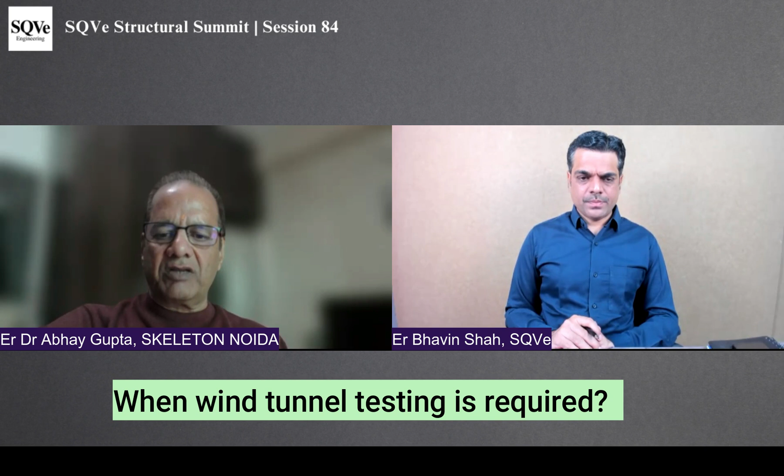If I refer to IS 16700, the code in India for safety in construction of tall buildings, basically for design of tall buildings, the new code has made it mandatory that all buildings and structures more than 150 meters high shall be subjected to wind tunnel testing. However, IS 875 Part 3 very clearly says any situation or building not covered by the provisions of this code, which is not a prismatic building. In general, we go with rectangular, square, circular, or triangular prismatic shapes, which do not have changes in geometry as you go up, or any offsets, or say in plan a building of plus shape, because architects, they dream, they are very creative people.

Architects dream some fantastic structures, and then the next day they draw them on paper and show them to the clients, and clients really get fascinated. And then it becomes a big challenge for the structural engineers like us. So they make really good shapes of the buildings.

We all have seen Burj Khalifa. The shape of Burj Khalifa has specifically been driven from the viewpoint of wind resistance. It is there. But there are many other buildings.

Recently, I was watching a video about the Capital Gate Tower in Abu Dhabi. If you have not seen that tower, just go to Google and search Capital Gate Tower. There's a vertical straight core, but the entire building is leaning on one side. So thousands of tons of weight is on one side on the foundation, completely eccentric. Those kind of shapes are very challenging, and you can't get the answer even for a standalone structure of that kind.

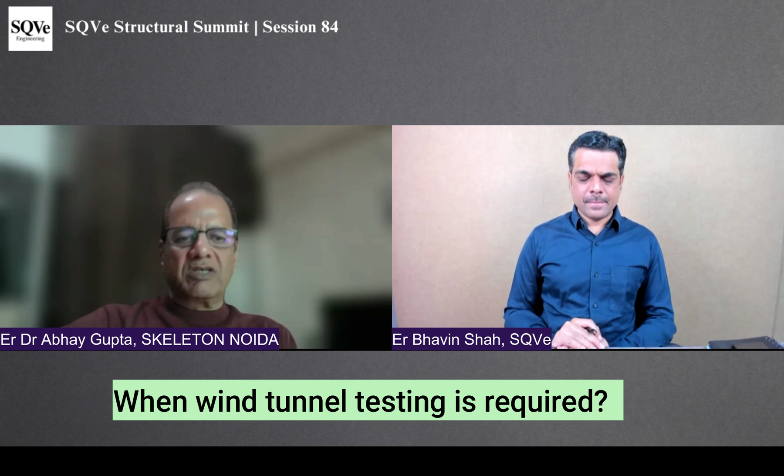Now, what is wind tunnel testing? Similar to many other testing, whether it is material testing or soil testing. Now, soil testing you cannot do sitting in the office. You have to take the equipment to the site and get the testing done. Every site is different. Similar to wind tunnel testing.

Now, in a wind tunnel you need a simulated facility which will create a wind environment similar to the atmosphere. Similar means the characteristics of the wind flow on the building or structure should be matching in the wind tunnel and in the atmosphere. Matching means what?

Those four parameters I told you about: mean wind speed and turbulence intensity. These two things are covered by matching the profile - the profile of wind velocity variation from ground to top. I'll explain more on that a little bit later.

Third is energy spectra. Fourth is turbulence scale, meaning the size of the eddies. Some wind tunnels only work on the first two parameters, but more refined, better facilities have all four parameters matching in the simulation. So once you have simulated those four using different techniques, that is wind matching.

In that, you put a model of the building, a scaled model of the building. You cannot put the whole building, so you put a scaled model to some suitable scale, generally 1 is to 100, 1 is to 200, 1 is to 300, or 1 is to 400. If the building is 400 meters high, a 1-meter high model has to be made. So that model is made.

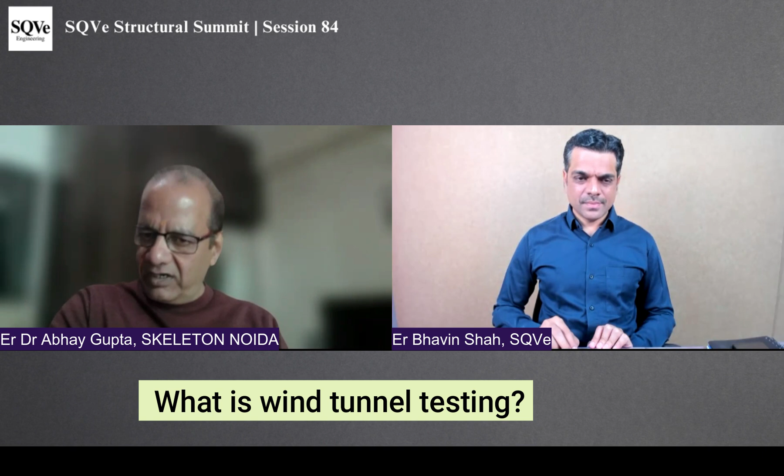With this brief introduction and necessity explained, we can take up the queries which have been raised. I have gone through the queries, very interesting ones. Maybe some of them have already been answered in this briefing, and the more complex or specific ones we will take now. So, Bhavin, please, let's go to that.

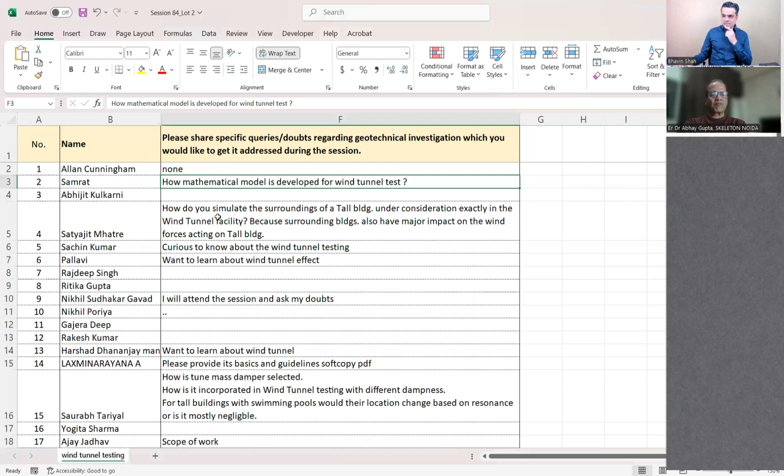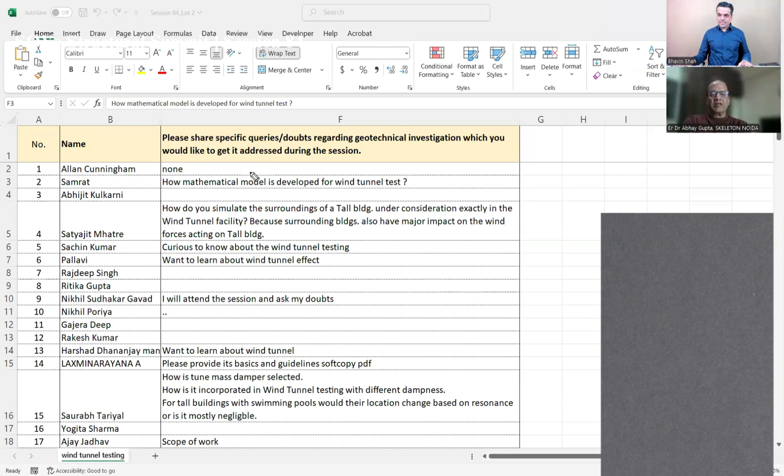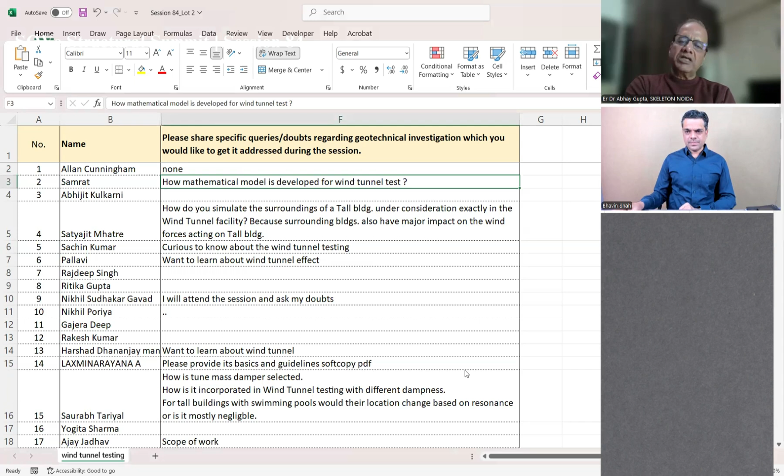How is the mathematical model developed for wind tunnel test? I believe he's asking how the different parameters are simulated. It is a scaling exercise - if I'm modeling a 400-meter high building to 1 meter, my geometric scale becomes 1:400. The same scale applies to everything else in terms of length. Then for velocity scale, suppose my design wind speed is 50 meters per second, but I cannot develop that inside the wind tunnel - normally wind tunnels test at 10 to 20 meters per second. If a facility tests at 10 meter per second, then 10 meter here and 50 there means my velocity scale becomes 1:5. With the geometric scale and velocity scale, I can get the time scale. This way, various scales are deduced, and a formulation of the prototype prediction is done. Some literature I've shared explains this. This is how the mathematical model for wind tunnel testing is developed.

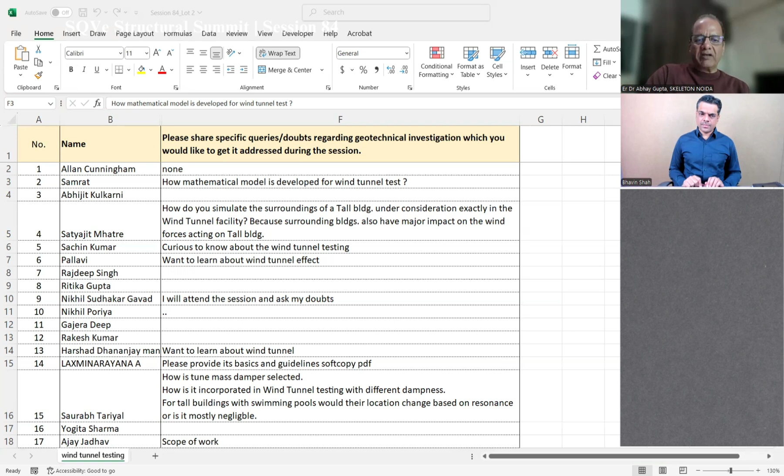Next question from Satyajit - how do you simulate the surroundings of a tall building exactly in the wind tunnel facility? This is very challenging. Whenever a project is tested, the wind tunnel testing agency generally asks the client to provide height and size of buildings within about 10 times the height of the building under consideration, but it's very difficult to get that data. So for a nearby area, about 3 to 4 times, they ask the client for building details. Otherwise, nowadays Google Earth provides very good information about objects present, and there are good tools that convert that Google Earth data into 3D images, which are then converted into physical models placed around the building. Some photographs I've shared show these building blocks which have been placed - most of them nowadays are done through Google Earth.

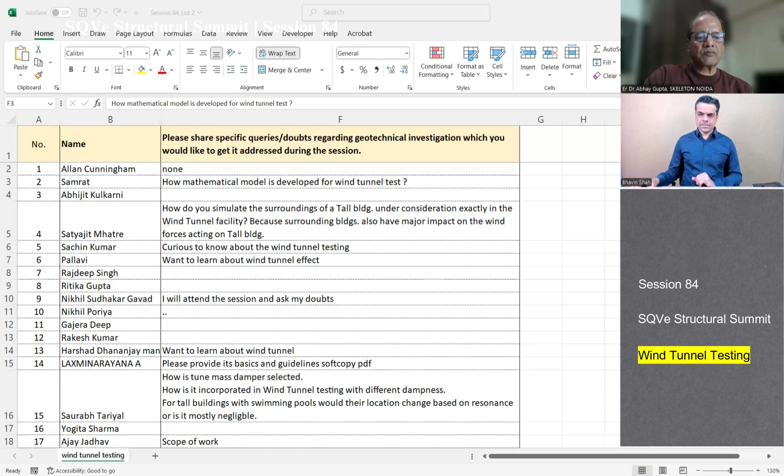Someone is curious to know about wind tunnel testing - I've already explained this in detail. The next stage would be to visit a wind tunnel testing facility whenever there's a test going on. Let me know if you're interested, we can certainly organize a visit to one of those facilities I've spoken about.

Pallavi wants to learn about wind tunnel effect - this is not wind tunnel effect. Wind tunnel is a facility which studies the wind generated effect, wind induced response of buildings and structures. Wind induced response means a building will undergo pressure, then force, and that force gets transferred to the structural members and foundation, causing lateral deformations. How much is the lateral deformation measured in the wind tunnel test - it's then computed backward using mathematics to determine the actual prototype deflection, deformation, and the acceleration in case of tall structures. This is very important - we calculate acceleration with the code, but instrumented models can also provide the acceleration value. These are some of the wind induced effects obtained from wind tunnel testing.

There are many more things for buildings - how the flow gets modified. There's one more big area for tall buildings: pedestrian level wind. Whenever a tall building or a group of tall buildings is constructed, the wind flow pattern near the base gets significantly modified and becomes violent. If you stand on the ground between a cluster of buildings during wind flow, you really get turbulent wind. It has been observed that children and senior citizens are more affected by this.

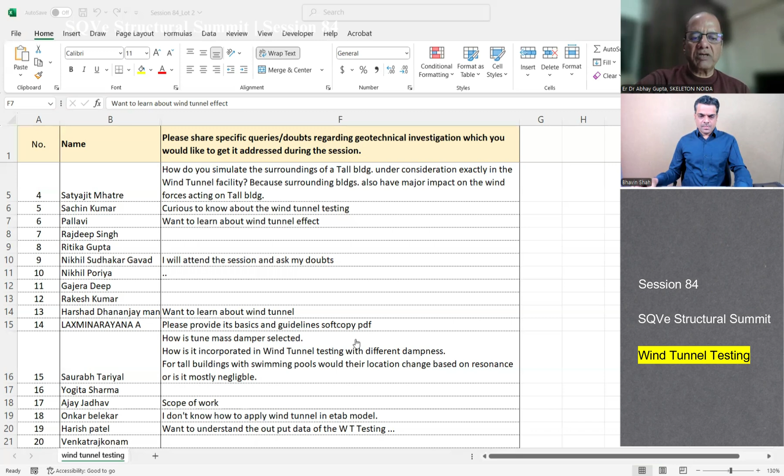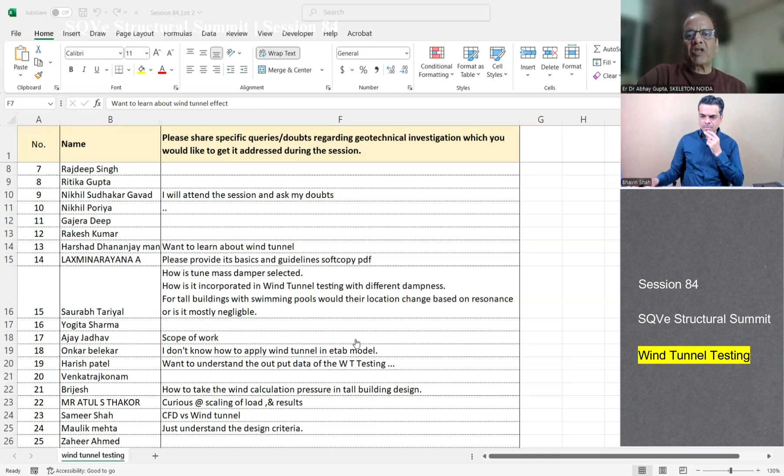How is a tuned mass damper selected? How is it incorporated in wind tunnel testing? For tall buildings with swimming pools, would their location change based on resonance? I will skip this question for now - I'm not going into the damping side, that's an advanced topic. So just highlight this for further discussion.

Ajay Jadhav is writing about scope of work - I already explained the scope of work, but if you need more, you can write specifically. I think Ankur is asking how the scope of work may be detailed out while preparing the terms.

Generally, the developer, engineer, or structural consultant would specify what parameters they are interested in. You provide the building configuration, and then specify we need surface pressure, base forces for foundation design, surface pressure for glazing in facade, pedestrian level wind study, standalone study, interference effect study. These parameters are specified, and accordingly the wind tunnel testing agency will quote for the proposal, even including future development. In one project, because the design life was more than 50 years, 100 years plus, we also asked for wind tunnel testing considering development of structures over a 100 year period from now - some anticipation, particularly from the predominant wind direction of that area. That is part of the scope.

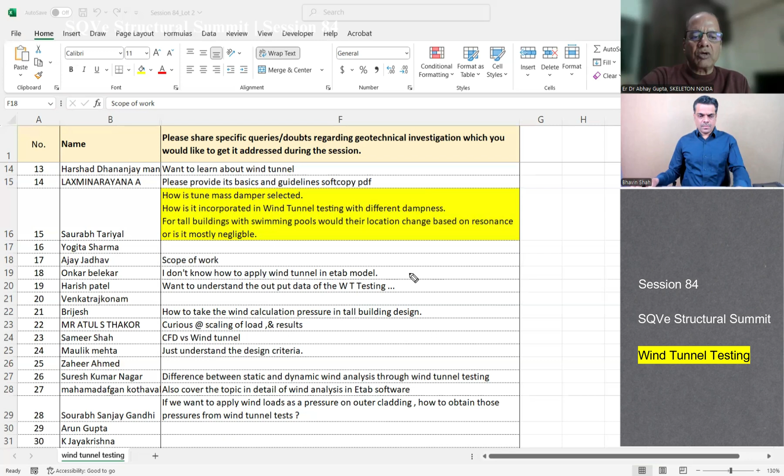I don't know how to apply wind tunnel results in ETABS model - this is a really good question. Basically, when you go to an ETABS model, you need to apply the wind force. First, you do it with the code - figure 4 given in IS 875 part 3 gives you the CF value. Then from the CF you work out the wind force at every story level. Generally people apply that on the center of mass or center of diaphragm in the ETABS model, but that's actually not a correct way - since it is easy for everybody, people have started doing that.

There is a marked difference between earthquake and wind force. Earthquake force gets generated at the center of mass - it acts at every mass, so applying a net earthquake force at every diaphragm at the center of mass is reasonably good. However, wind force does not generate at the center of mass inside the building. Wind force generates on the surface because the surface is obstructing the wind, so it should be applied on the surface.

If you cannot apply it on the entire facade as a uniformly distributed load in Newton per mm square or kilonewton per meter square, you can divide that into story levels. This is also written in the code - you can apply it at the story level above and below as a horizontal line force, because at every story level you have a horizontal beam connected to the main lateral load resisting system. So you can divide the entire wind force by the width of the building perpendicular to the wind direction and apply it there - that's a more reasonable way of doing it. Some people believe applying the entire force on the windward face is not okay, but if you read IS 875 part 3, it very clearly states that this force has to be applied on the windward side as complete wind force.

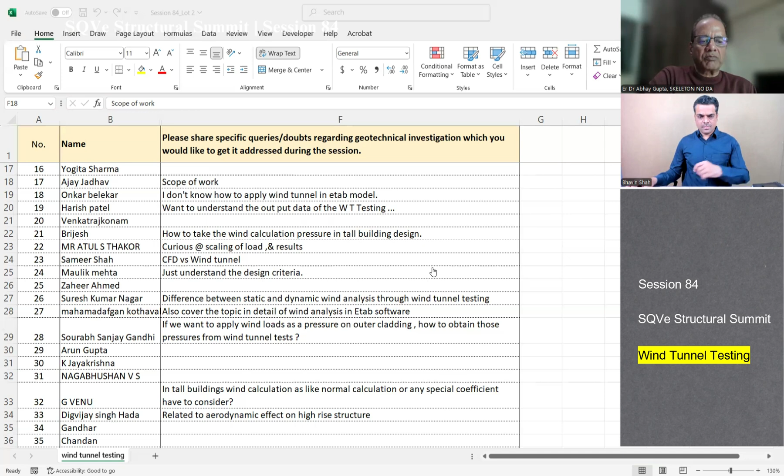G Venu asks, for tall buildings, is wind calculation done as a normal calculation or are special coefficients needed? No, it is as prescribed in the code using the CF approach. For dynamic analysis of tall buildings, you have to go to the dynamic section using the gust factor approach.

Analytically, the along-wind response procedure is very clear. But analytically, a crosswind response procedure, as given in the code - not only Indian code but worldwide - cannot have a mathematical formulation unless there is input from wind tunnel testing.

If you look at our code, there are two graphs given. One graph is for one plan shape of building, the other is for a different plan shape. These are specific to those plan shapes and terrain categories. If there is a change in the plan shape or aspect ratio, those graphs are not valid.

Why? The CFS value, crosswind force spectrum, is obtained from wind tunnel testing. The moment the aspect ratio changes, the plan aspect ratio changes, or the building shape changes, the CFS changes - because in crosswind response, resonance is very important and critical.

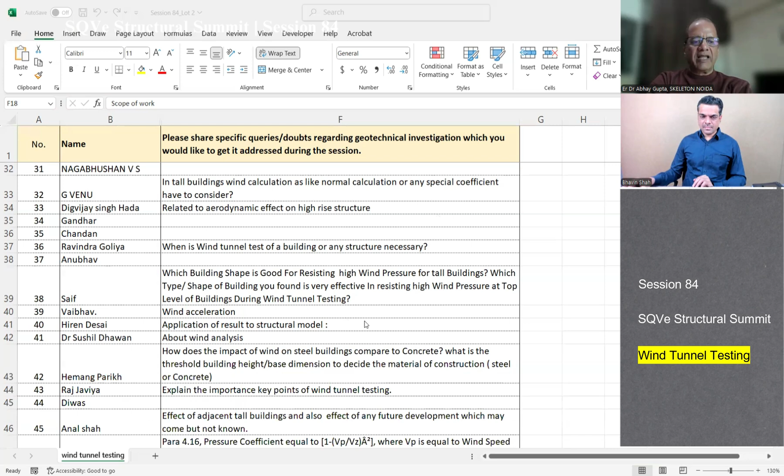Which building shape is good for resisting high wind pressure for tall buildings? Which shape of building is very effective in resisting high wind pressure at the top level during wind tunnel testing? See, any shape which does not promote vortex shedding, like a streamlined shape in plan - but a streamlined shape for a building is not possible.

So corner modifications are done - chamfering, some gaps, openings are provided. They really help control wind-induced response significantly.

As far as along-wind response is concerned, whatever building area there is has to be considered. When it is the gust factor approach, probably the stiffer buildings will undergo less response. But every time it's not possible because of other considerations like earthquake design, or maybe architectural restrictions prevent creating a very rigid structure.

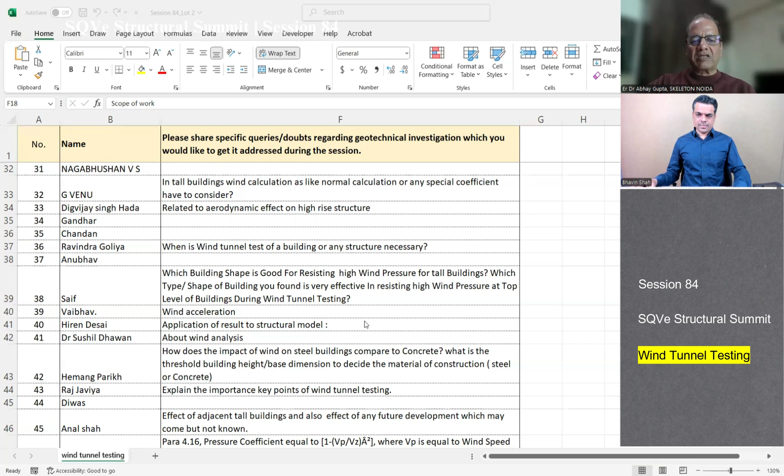So whatever structure is there, you can just consider some modifications in the corners. But in India, we rarely get this opportunity because architects freeze everything first and then come to the structural designer.

That is the thing - wind-induced acceleration. Yes, there's a big issue of wind-induced acceleration, particularly in tall buildings and also for people sitting in balconies or objects kept there. There are limits prescribed in the code, which also gives an expression to calculate it, but with wind tunnel testing we can also work out wind-induced accelerations. It should be controlled properly.

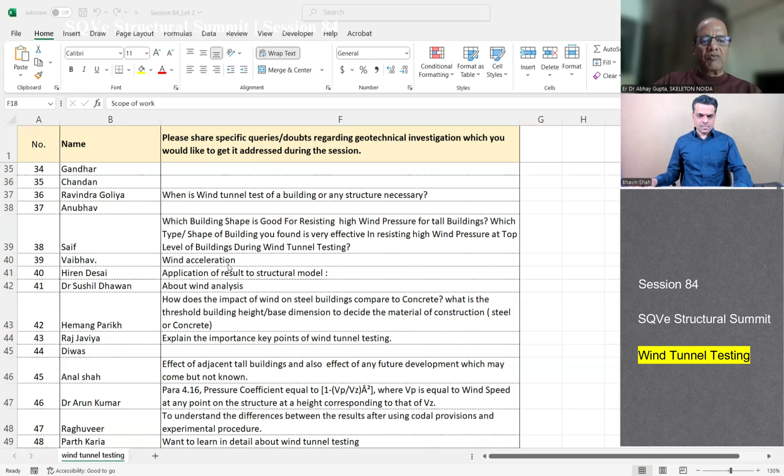Hiren Desai ji is asking about application of results to structural model. I already explained that. Dr. Dhawan asked about wind analysis - sir, I hope I have been able to address this.

Hemang asks, how does the impact of wind on steel buildings compare to concrete? What is the threshold building height or base dimension to decide the material of construction?

There is as such no prescribed thing. You can make anything in concrete, you can make anything in steel. Nowadays, very good concrete systems, very good composite systems are there.

As far as the impact of wind on steel buildings compared to concrete: steel buildings have less damping, so they undergo larger accelerations. Concrete buildings are more rigid, so they are comparatively less affected than steel, but steel resistance is far better. The only thing is connections have to be very carefully done, because wind in a crosswind direction is a regular phenomena. Unlike earthquake, which comes once in several years.

In wind, you are designing with an elastic approach. In earthquake, you are going into the non-linear range, and you expect the building to damage. In wind, you are not expecting the building to damage - they remain elastic, so they keep oscillating even under ambient vibrations, under normal conditions. So the steel connections should be very properly designed and detailed. That is important. In concrete, it is all rigid.

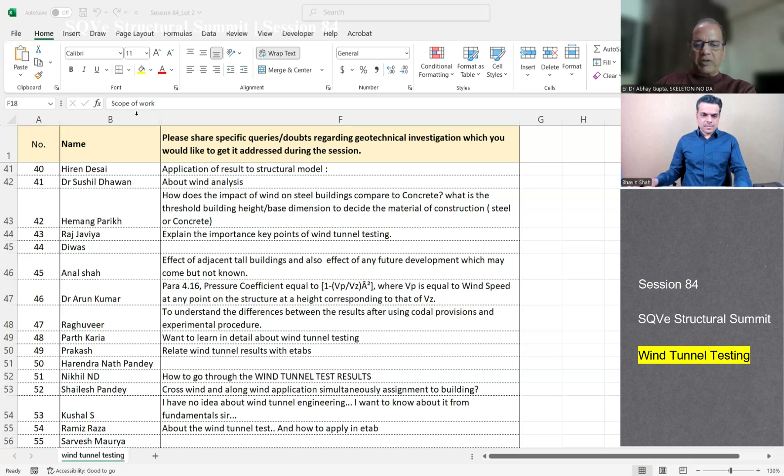To understand the difference between results after using codal provisions and experiment - yes, there are gaps, and the code says if your wind tunnel testing results are lower than the analytical results, you should not use lesser than 70%. In most cases, you get a benefit of wind tunnel testing. There are many parameters taken conservatively in the codes, and hence wind tunnel testing affects this. In many of my projects, I have seen that we go to that 70% value. Suppose I am getting 100 kilonewton force from analysis, and 70 kilonewton from wind tunnel testing - it significantly makes a change in the design.

Want to learn in detail about wind tunnel testing? Okay, I have already explained in detail, and more if you want. Maybe we can have a separate course on that as a training program.

Relate wind tunnel results with ETABS - I have already done that. How to go through the wind tunnel test results - already explained.

Crosswind and alongwind application simultaneously - yes, there are provisions. You have to apply both of them simultaneously. There are load combinations given for both of these to be applied simultaneously.

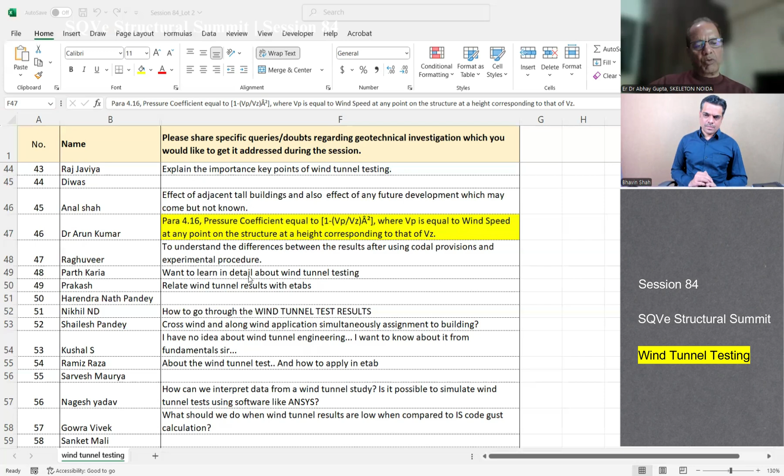I have no idea about wind tunnel engineering, I want to know about it from fundamentals. I've explained the fundamentals in the beginning. Please go through it once, and then go through IS 875, and there's a handbook on IS 875 part 3 which was prepared by a team under Professor Prem Krishna - I was also part of that. It is available on the NICEE website. You can read that for knowing more on that. There are worldwide documents on wind tunnel testing.

I have shared some of them. There is a document from AG Davenport Wind Tunnel, Ontario, Canada - it's a very good document. Regarding wind tunnel test and how to apply in ETABS - already covered. How can we interpret data from a wind tunnel study?

Is it possible to simulate wind tunnel test using software like ANSYS? Yes, I have explained that CFD you can use. It is being done on a large scale.

What should we do when wind tunnel results are low when compared to IS code? 70% - straight away, not less than 70%.

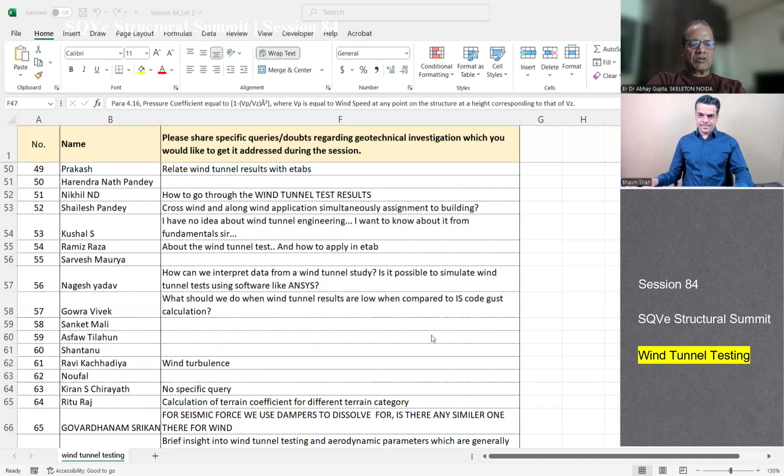Wind turbulence means basically the change in the characteristics of the wind because of obstructions present at the Earth's surface. Whenever the wind crosses any obstruction, eddies are generated. Those eddies are generated in the vertical plane as well as in the horizontal plane, depending on the shape of the object it is obstructing. When these get mixed up with the flow, there is a fluctuation in the wind speed.

That fluctuation is called turbulence, and it is measured by the root mean square value of the statistical parameter. If you draw a plot of time varying wind, it is a zigzag value, and then some statistics is applied to get the mean velocity, peak velocity, RMS velocity, and they give the measure of wind induced turbulence. But you can also measure the size of the eddies - that is important. In IS 875 part 3 gust factor approach, there is a parameter called L, which indicates the eddy size.

Calculation of terrain coefficient for different terrain categories - don't bother about these things, they have been assigned. There are 4 categories, now we are making them into 6 categories. Just try to match your condition with one of those closest to it and use that prescribed value. It has been measured worldwide at many sites, and those coefficients have been obtained, so you need not do the coefficient calculation.

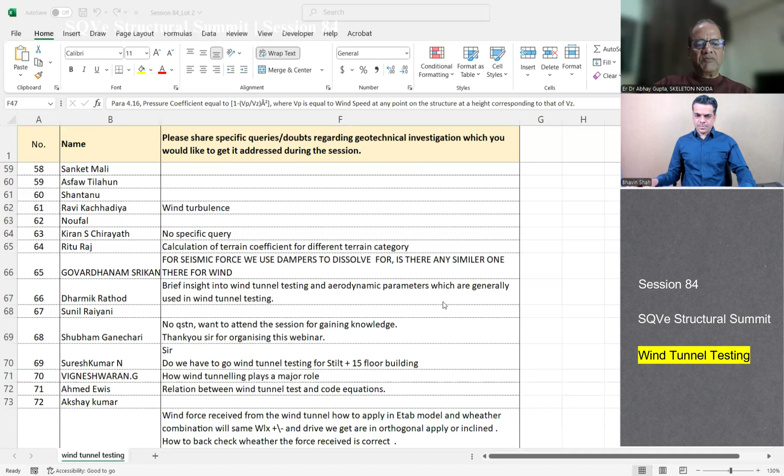Brief insight into wind tunnel testing and aerodynamic parameters generally used in wind tunnel testing - I've explained about them in detail earlier.

I want to attend the session for gaining knowledge, sir.

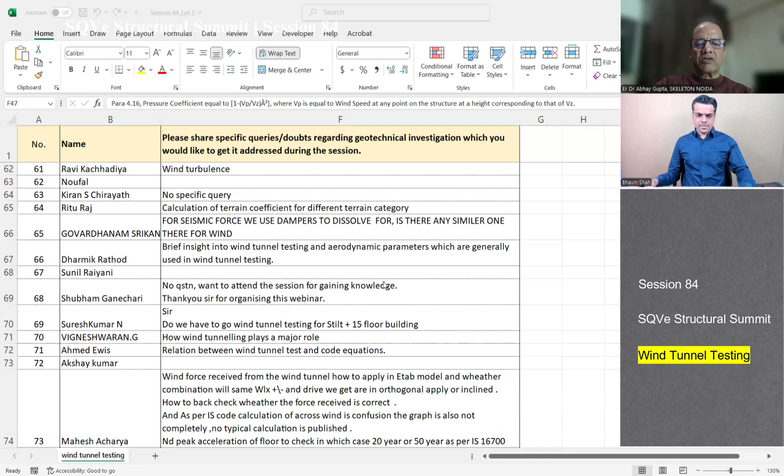Do we have to go to wind tunnel testing for a stilt plus 15 floor building? Code says no, but code also says if the stilt plus 15 floor building exists in a group and has a complicated plan, if you cannot calculate - 15 plus stilt would be something around 60-65 meters maximum height, you can use the codal approach and get a conservative value, not an issue.

Depends how slender it is - you have only said height, what is the base width? If it is too thin, yes, you should do wind tunnel testing.

How does wind tunneling play a major role? It plays a major role because that is the authentic, correct, reasonable way of studying the wind-induced response and wind forces on the building structure. You can't get it otherwise, only from the code.

Relation between wind tunnel test and code equations? No relation as such. Wind tunnel testing is an actual observation of the data of the phenomena on the simulated model and wind characteristics. Whatever results you get, you can compare them with the code equations. That's all, except the crosswind response value, where crosswind force spectra has been obtained from the wind tunnel test.

Wind force received from the wind tunnel test, how to apply in ETABS model, and whether combination will be same? Yes, it is the same combination. I've explained it, and derive R in orthogonal, apply orthogonal only. How to back check whether the force received is correct?

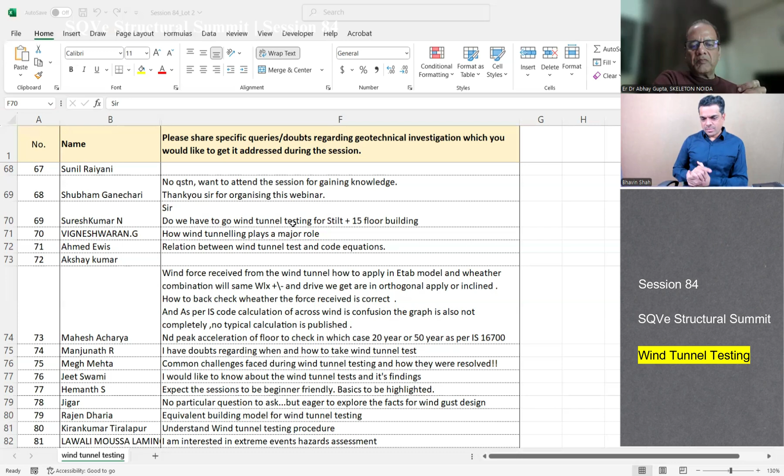But if suppose there is something mounted on a particular floor, for that acceleration you have to do a separate calculation, like in machine foundations. So the question was whether we should check it for 20 years period or 50 years period. 20 years, it is given in the code. So, 20 years acceleration, yeah.

Manjunath is asking, I had doubts regarding when and how to take wind. I have explained in detail, sir. If you have more queries, please call me.

Common challenges faced during wind tunnel testing and how they were resolved - that's a big area. Challenges when you try to do an experiment: simulation itself is a challenge, simulation of wind is a challenge, simulation of building model is a challenge, near field buildings is a challenge, instrumentation sensitivity is a challenge, getting correct data is a challenge, then post processing - everything is a challenge. It's a major experiment, it's not a simple thing.

You can watch some YouTube videos, you can even visit some facility. When I got the wind tunnel testing of the Lord Shiva statue done, I went to Sydney just to see what kind of good things there, and was really impressed with that.

I'd like to know about the wind tunnel test and its findings - explained, sir. Hemanth expects the session to be beginner friendly, basics to be covered. I have tried to do that, but if there are still some doubts, please go through the literature which I am sharing, and then even you can ask me. No particular question, but you got to explore the facts.

For wind gust design, you must understand what wind gust design is. For that, you must go through the IS code, and there are two very good books: Wind Forces in Engineering by Peter Sachs, and Wind Engineering by Simiu and Scanlan. These are two very good books which explain in detail. There is also one book by Professor N.C. Nigam in the Indian context, that is also a good book.

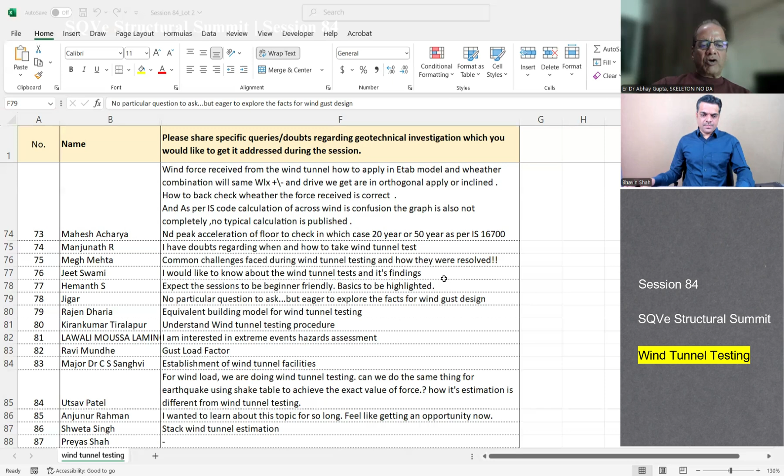Explained, sir. But when it is beyond building, suppose we want to do a chimney - in case of a chimney, we really make an aeroelastic model. That means it's a model which has the same dynamic characteristics as the original chimney in terms of mass distribution, stiffness distribution, and natural period. In case of a building, it is not required because buildings are predominantly in fundamental mode of oscillation, so a cantilever model, an equivalent cantilever model, works. But TV towers and chimneys have multiple modes of oscillation, so there we have to go further. We have done a lot of chimney testing at Roorkee also.

I'm interested in extreme event hazard assessment, but I'll keep it out of scope for today's talk.

Gust load factor: when there is a rigid structure which does not oscillate, it generates only pressure, which may vary, so you only need a static pressure value. But when the structure itself is oscillating, there is an interaction between the structure and the wind, causing an amplification of the response. This amplification, due to the dynamic characteristics of the structure, is called the gust effect. This gust effect can sometimes be 2, 3, or even 4 times the mean value. So depending on the dynamic characteristics of the structure, this gust load factor is calculated for both along wind and across wind.

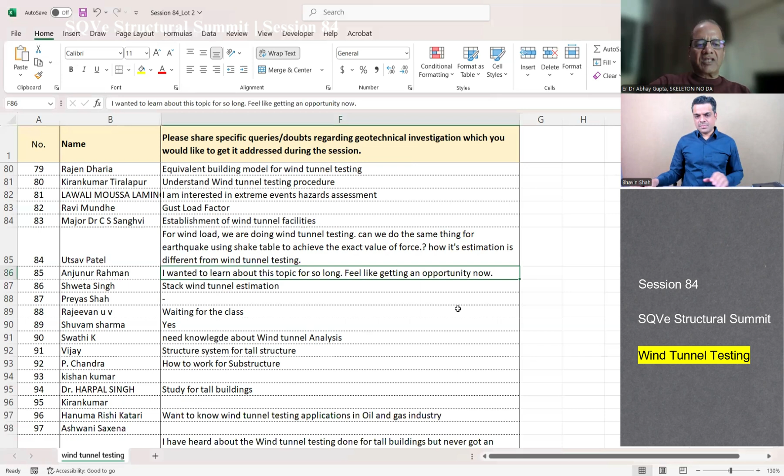I wanted to attend, I wanted to learn about this topic for so long, I feel like I'm getting an opportunity. I'm so happy that you are looking for this, and I'm sure this will only trigger some initial information - more we can continue to discuss.

Stack wind tunnel estimation - please explain more. I'm not able to understand what is meant by stack wind tunnel estimation.

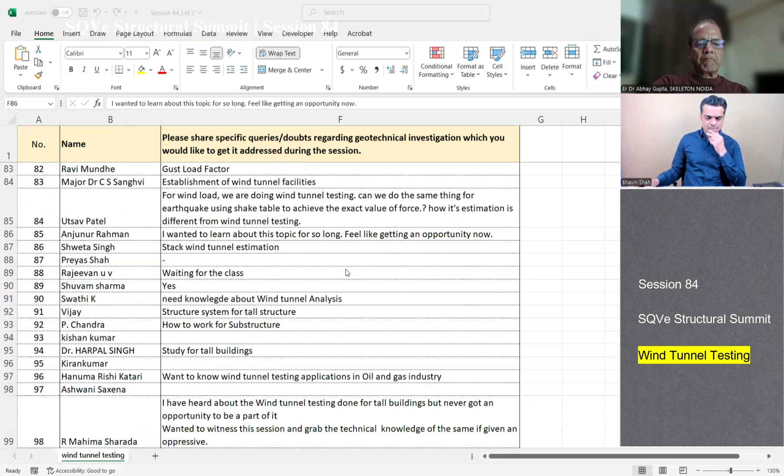Waiting for the class - need knowledge about wind tunnel structural systems for tall structures as prescribed in IS 16700. Wind tunnel testing has nothing to do with that.

How to work for the substructure? There is no wind on the substructure, but only the effects of the superstructure will be transferred into the analytical model.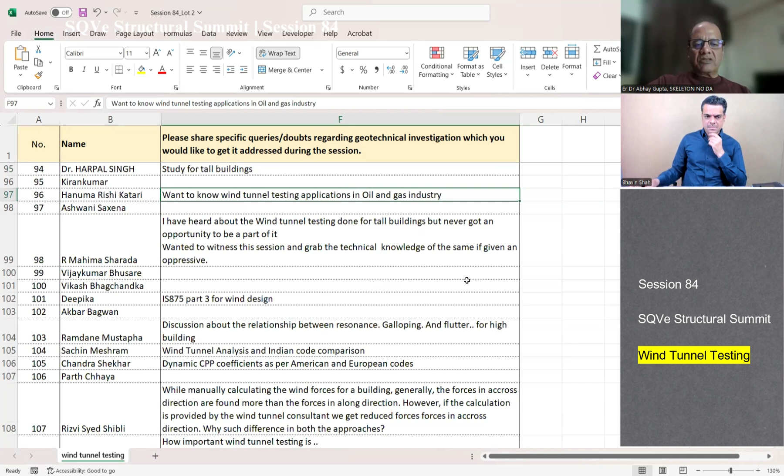Study for tall buildings - want to know wind tunnel testing applications in the oil and gas industry? Yes, several oil and gas industry structures are complicated, slender, and have lesser permissible lateral sways and deformations. They are subjected to wind tunnel testing in many facilities, particularly in coastal areas where high winds flow, so modeling has to be done. It is very difficult to get their values right from the code only, because there's such a closed network of structural elements that it's bound to get interference from each other. I've heard about wind tunnel testing on tall buildings but never got an opportunity to witness the session and grab the technical details - okay, all the best.

IS 875 part 3 for wind design - yes, it is there, go on reading it, raise queries. It is under revision also.

More queries will help bring out a better document about the relationship between resonance, galloping, and flutter. When vortex shedding happens from the side, you get resonance when the vortex shedding frequency matches the building frequency. Galloping and flutter are associated phenomena, not very common on the building side, so just for academic interest you can read the literature - they are not explained in much detail in the code either.

Wind tunnel analysis and Indian code comparison - I explained that the Indian code estimates conservative values, which is okay for code purposes. That is why it provides the opportunity to go as low as 70% if wind tunnel testing results are less. Dynamic Cpp coefficients as per American and European codes.

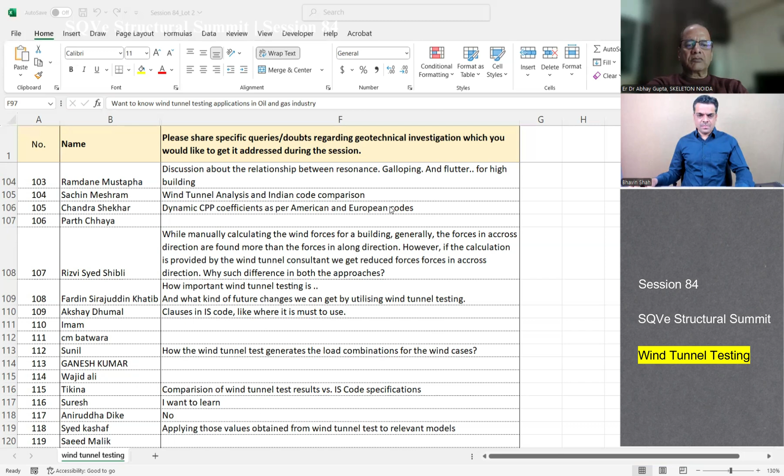Point number, dynamic CPP, 105. Yeah, 105.

While manually calculating wind forces for a building, generally the forces in a crosswind direction are found to be more than the forces in a longwind direction. However, if the calculation is provided by a wind tunnel consultant, we get reduced forces in a crosswind direction. Why is it? Actually, crosswind force estimation as per the code is just a very approximate estimation, which may be off by plus minus 25%, even more, because you have very limited information in the code about crosswind forces. Your building characteristics may rarely match with that, so you get a very different value in crosswind.

Longwind is very well detailed. There is a mean force and then some oscillation. It is monotonous. While crosswind is an oscillation force, continuously changing, depending on the building frequency and on resonance. In a wind tunnel, you are able to get that phenomena properly recorded. That is the difference.

How important is wind tunnel testing? Very, very important. All tall buildings, all complicated structures, even logistic parks being constructed in the country now with several solar panels on the rooftops, there is no treatment given in the code or books for continuously arranged industrial structures in a large complex of 200 acres or so. So whatever estimations you are doing may be true for the first building in the windward direction, but all subsequent buildings have a much different wind pattern. The tunneling effect between two buildings is not documented anywhere. So this is very, very important for low-rise buildings also, if you want to save money on that.

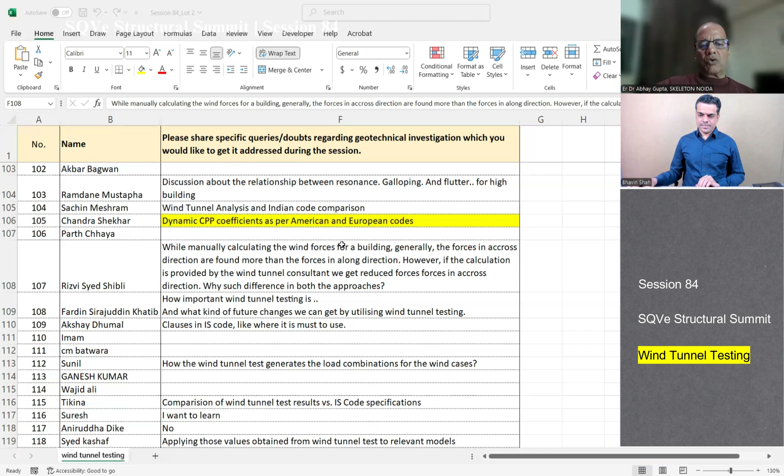How does the wind tunnel test generate the load combinations for wind cases? It doesn't generate that; it only gives the wind force. Everything else you do mathematically on the software.

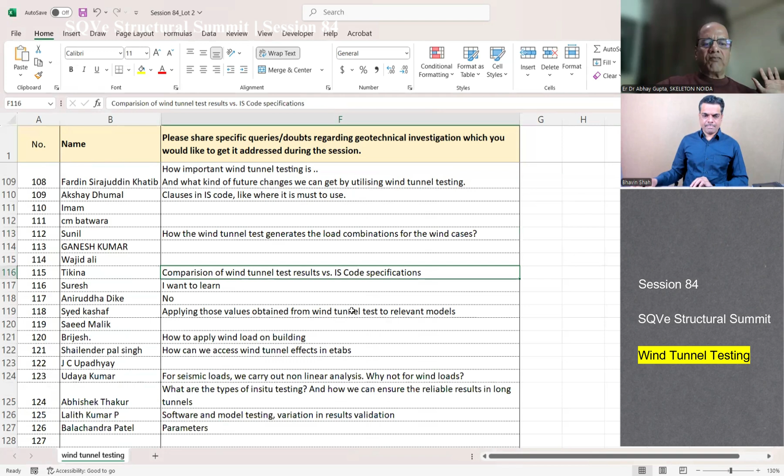Comparison of wind tunnel test results, I already explained. Applying these values obtained from the wind tunnel test to relevant models has also been explained already. How to apply wind loads on a building, how can we access that?

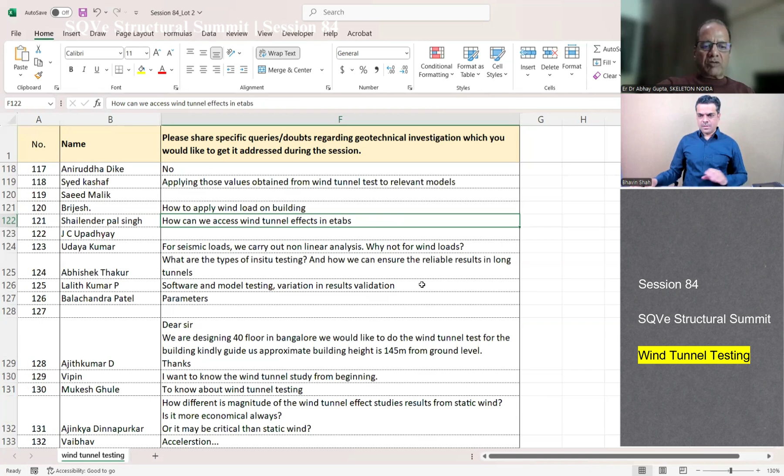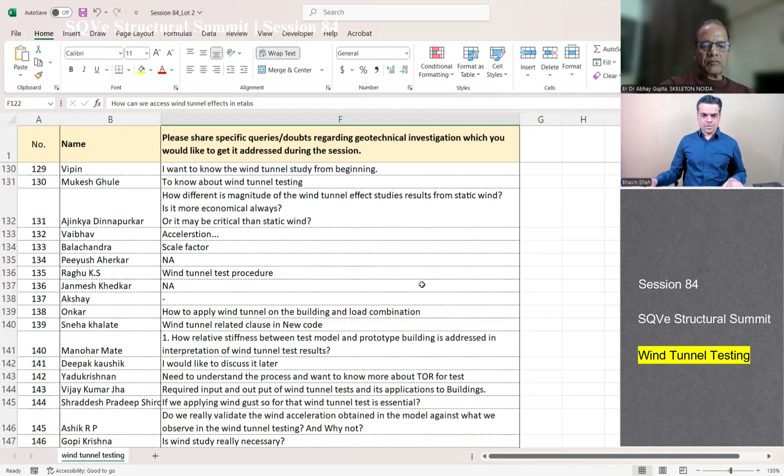Bhavin, it seems we will have a break here. Yeah, I'll take up your questions now first, because most of the questions are now repeated. If there is any specific one left, we'll check it again. But as of now, because we'll be winding up in another 10 minutes, we take up your questions. I'm happy that you have done a lot of brainstorming and homework, and have come out with these things.

What are the key elements to include in the terms of reference for a wind tunnel testing agency? It's a very good question. We are preparing a document for this, the TOR for wind tunnel testing.

Basically, as I explained, you should be very clear about the objectives depending on the building situation, whether it is low rise or high rise, whether it is a single building or multiple buildings of the same height, and whether you need glazing and facade study also, or acceleration study. Everyone can download a very good report from RWDI about Burj Khalifa, available on the RWDI website. At the same time, Windtech Australia also publishes a very good newsletter on their website. If you register and subscribe, you get that newsletter wherein they describe their wind tunnel testing projects in detail. That will be a very good informative document for everyone.

How should the TOR address unique building design features such as unconventional shapes? This has to be very meticulously drafted, sir. Depending on the building shape, the building usage, the offsets or anything, each and every element has to be drafted. And in the process, you can have a pre-bid meeting with the testing agency, get their inputs, and finalize a common TOR for any particular project.

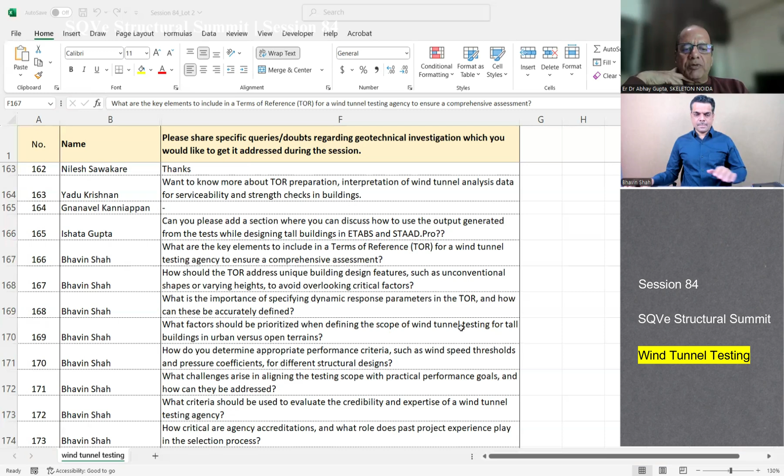How do you determine the appropriate performance criteria, such as wind speed thresholds and pressure coefficients for different structural designs? It is primarily all governed by serviceability requirements depending on the use of the building. If it is a habitable building, the human perception threshold of acceleration in motion becomes very important. Some performance criteria about lateral deformation depend on the cladding facade type - if it's a brittle cladding like glass, a lesser amount is permitted. So performance criteria depend on the usage of the building, the nature of the material used, the type of glazing facade, the occupancy, and those kinds of things.

Like we are designing several tall statues these days. In statues, we know nobody is going to be there, so I can allow a little higher lateral deformation. If I'm using a concrete skin, then a lesser value; if I'm using a bronze skin, then a higher value on the statue - like that. So depending on the usage, the performance criteria are there. Normally in our country, we are not defining the performance criteria based on whether the building is in the city or in the jungle - they give the same criteria everywhere, but that may be one of the parameters affecting it.

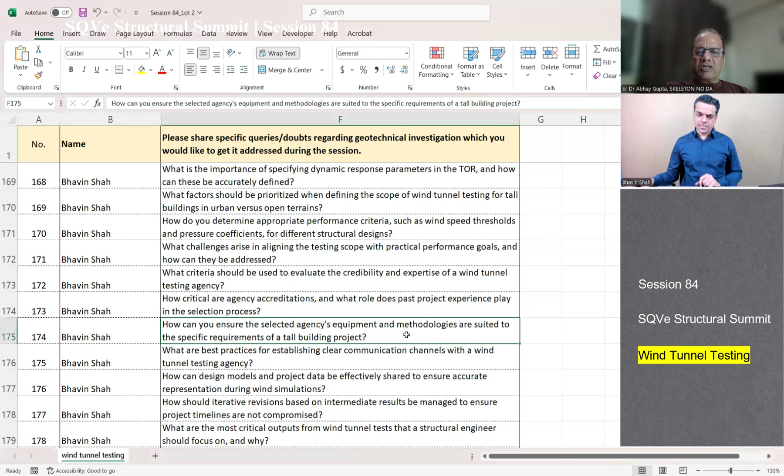One of the widest wind tunnels in Japan was created specifically for the Akashi Kaikyo Bridge, which is 4 kilometers long. When it was to be tested, the scale came to 40 meters for the actual prototype section. You can imagine how many fans they would have used - a single fan cannot work, so they created a multiple fan wind tunnel for that width. Japan has amazing facilities.

What are the best practices for establishing clear communication channels with wind tunnel testing agencies? Somebody in the organization should be assigned who has knowledge of wind tunnel engineering and structures both, and should discuss with them to give our inputs and get their inputs. That's the best way of establishing communication.

How can design models and project data be effectively shared to ensure accurate representation during wind simulations? It's about an effective interface, as already touched upon that point.

How should iterative revisions based on intermediate results be managed to ensure project timelines? Generally wind tunnel testing at RWDI or Windtech Australia takes 6 to 8 weeks, so it doesn't hamper timelines. Initial designing is always done based on codal provisions. However, Indian wind tunnels take a little more time - even 3 to 4 months. So we need to plan properly, and there is no preliminary data otherwise. They do a desktop study first - if you give all data and the work order to the wind tunnel testing agency, they do a desktop study and give you some primary preliminary values that can be of help.

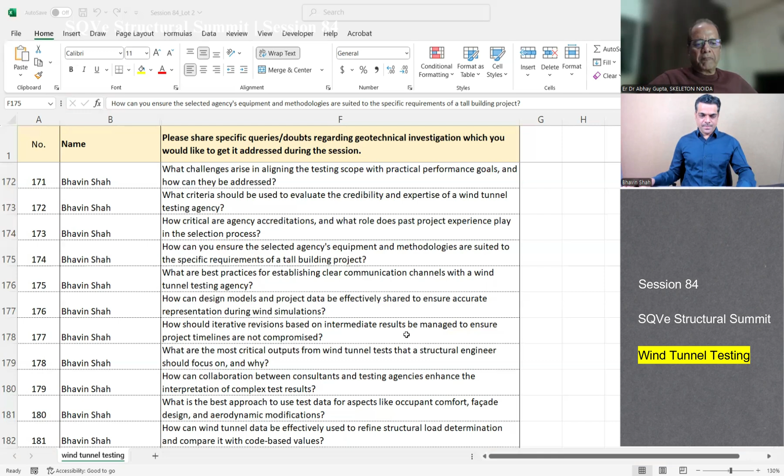How can collaboration between consultants and testing agencies enhance the interpretation of complex results? You should continuously interact with them. You should even go to witness the test wherever it is happening and feasible. Generally what I do is put a clause in the TOR itself that one visit of the client's team, including a structural engineer, should be fully supported by the testing agency.

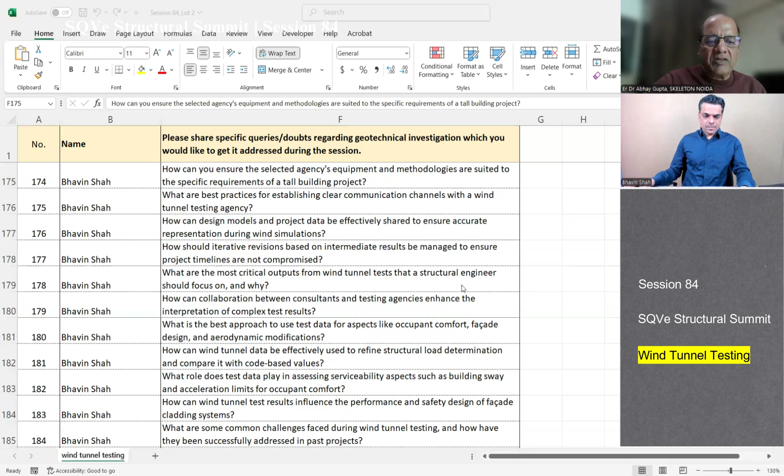What is the best approach to use test data for aspects like occupant comfort, facade design, and aerodynamic modification? As far as comfort and facade are concerned, that data you directly get from the wind tunnel agency. However, for aerodynamic modification, you need to specifically put it into the scope, and then some preliminary studies should be done on the standalone model with 2, 3, or 4 options.

This is nowadays done more in CFD. Yes, so from there you go to the wind tunnel testing with the final one or two shapes.

How can wind tunnel data be effectively used to refine structural load determination and comparison? We are getting much different values, and lesser values also in many cases. So the code also allows that.

What role does test data play in assessing serviceability aspects such as building sway? We get the data from the wind tunnel testing about the lateral sway, acceleration, etc. The limits are prescribed from international organizations about human comfort, and they are also reproduced in our code, and we should stick to them and compare with them.

What role does test data play in assessing serviceability, and how can wind tunnel test results influence the performance and safety design of facade? It's very, very important, very critical. Crores of rupees are being spent on the facade, so this should be a part of the TOR, that this study is required. It is there.

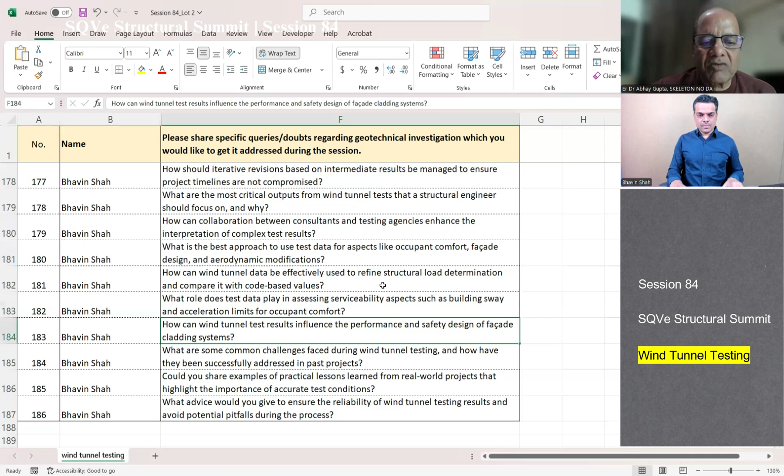We did the Nathdwara Lord Shiva statue, which was situated on a 50-meter high hillock, and the wind tunnel testing agency collected the entire geography. We gave them the data about the structure, but since as of now there are no structures around, we showed them some areas around where future developments could be in India. They took Google imagery and collected wind data from three meteorological stations around the site and airports, and then predicted what could be the wind speed and nature after 250 years. So this was a very good project where the actual field conditions were built into the model, and back working was done.

But otherwise, for every building project that we do, we have to provide real data. We are working on 200-meter high six towers, which are connected at the rooftop in Gurgaon.

That wind tunnel testing is being done by Windtech Australia, and it's a very good discussion exercise going on. We are also getting done a 100 feet high sword memorial being made in Assam, Guwahati, in the memory of the Lachit Borphukan sword. It's 100 feet high, so that sword is also being tested by Windtech Australia's wind tunnel testing. That's the real life project we are doing.

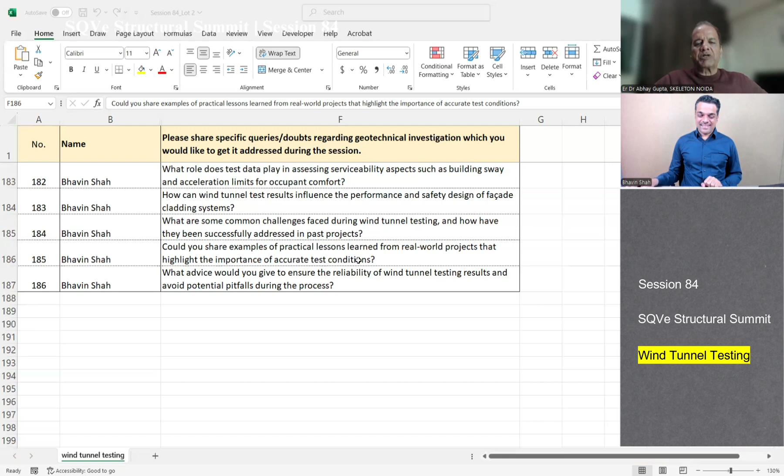With this discussion, I'm thinking that every organization should have a position called a wind engineer. Right, there has to be. Similar to a geotechnical consultant, similar to other specific aspect people, you should also have a wind engineering consultant in every structural organization, or even those developers who have tall buildings in their portfolio. They should have one.